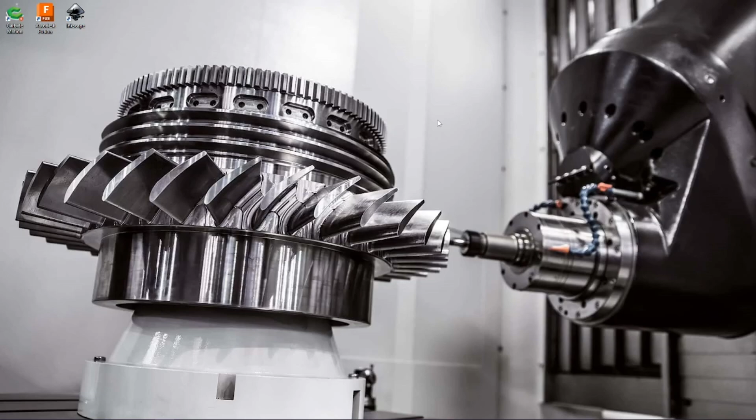I was working on an engraving project today and thought I would share an easy way to convert JPEGs and other file types to usable sketch geometry in Fusion 360. The first thing you need to do is install Inkscape, and we're going to use it to create a bitmap from our files that we can use in Fusion.

I already have this set up as a template. When you open a fresh session, you'll just have a blank canvas. I have mine set to a 10 by 10 inch square, but I know the surface I'll be using in Fusion is a 4 by 4 inch square, so we're going to edit that in our document properties.

We're going to change that to 4 inches by 4 inches, and we're also going to adjust our scale. We'll go to pixels, change that to 1, then go back to inches. This is the number you want to see right here—it'll help us properly scale our image, because if you do it default or mess with it any other way, it'll come out kind of wonky. So make sure this is the number you see when you adjust your scale.

So we can zoom into our canvas with this button here. Now we're going to bring in our file. It's a simple black and white image.

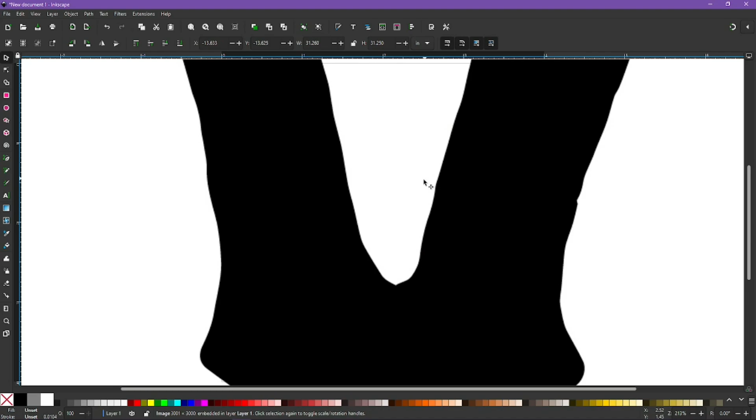Now it's kind of large, so we're going to adjust it—height to 4, width to 4. In our canvas, this top left corner is our origin, so we're going to align the image to our origin: X0, Y0. Now we're in place.

Now you want to go to Path and Trace Bitmap. We have our little preview screen, and we're going to go to Edge Detection and click Apply. These sliders are more for multicolored images—stuff where it'll detect the different colors and smooth out any rough edges you may see—so we don't really have to worry about that.

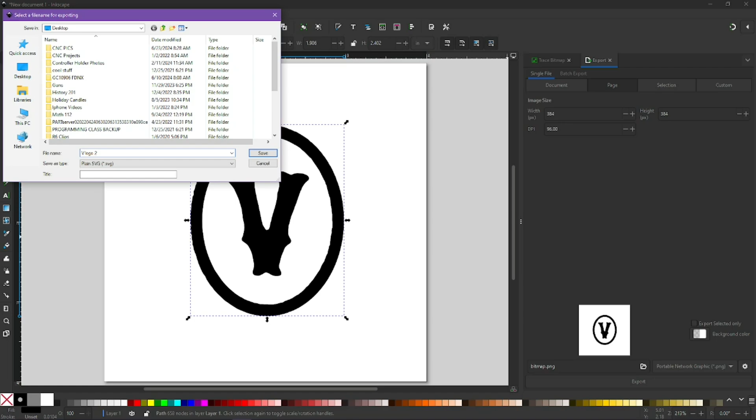We're going to go to export, and the scale looks correct. We'll select plain SVG, not Inkscape SVG, and we'll just call this V logo 2, since there were a couple of trial runs and I don't want to resave the same file name.

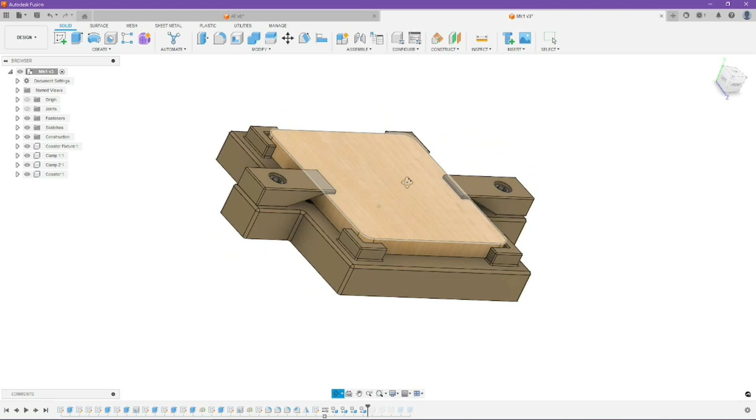Now we want to open up our session in Fusion. This is the plane we're going to be using—just a square 4x4 coaster that I want to engrave. This is on a 3D printed fixture I designed just for doing these coasters. If you don't have a cheap 3D printer in your woodworking shop, I highly recommend it.

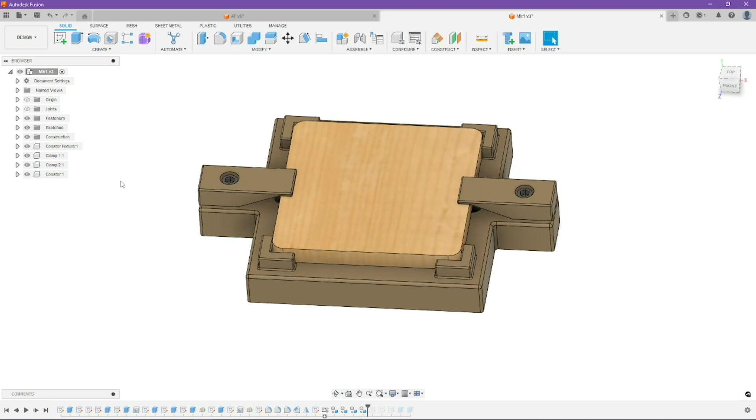They're not a super expensive investment, and they're super handy, especially for making specialized fixturing for projects like this. We'll turn off a couple of these features, the clamps and stuff, just so we have a clean visual of our workspace. So we're going to select this top surface, or whatever surface you want to insert your SVG on.

We'll go to Insert SVG, Insert from my computer, select our file. Now it's upside down, but we're not going to worry about that yet. You see it snapped to the center of this surface, so doing a quick bit of math, half of 4 is 2—move that, half of 4 is 2 again—and rotate 180 degrees.

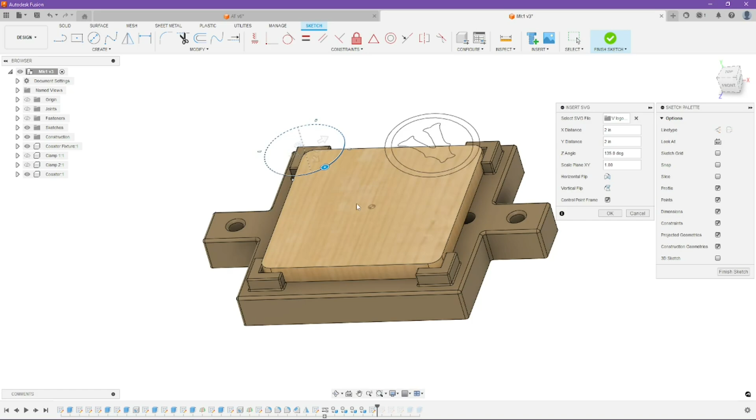Then we're going to unselect all these, so all we see is our lines. Finish. Now we're ready to go to our Manufacture workspace. We'll delete that one, and go to engrave.

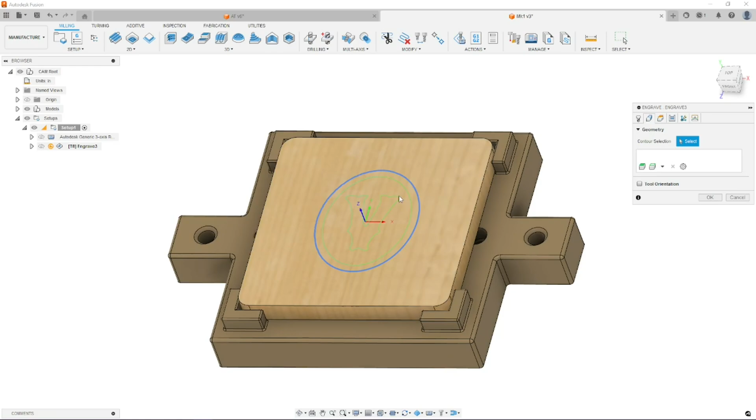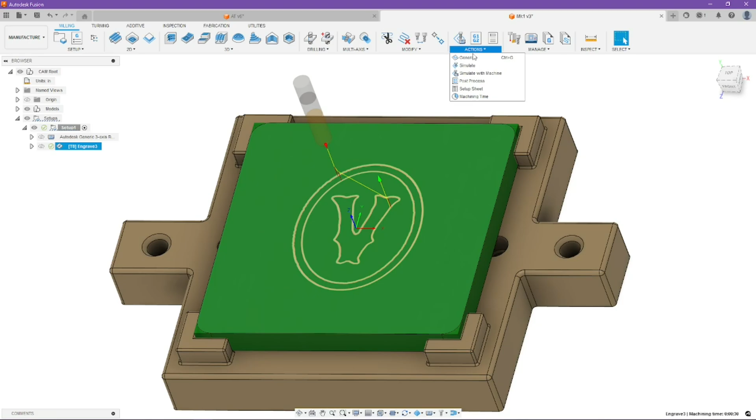Select our engraving tool, turn off coolant because our CNC router does not support coolant. Select our lines that we want to trace. Definitely don't want to go negative 200 thou, so we'll just do negative 20. That's fine, click OK. Then we'll go to simulate. There you go—easy peasy.

Now, I will tell you, it took me longer than I'd like to admit to figure out how to get this thing to scale properly. But now that we've got it all ironed out, this is a super simple process.